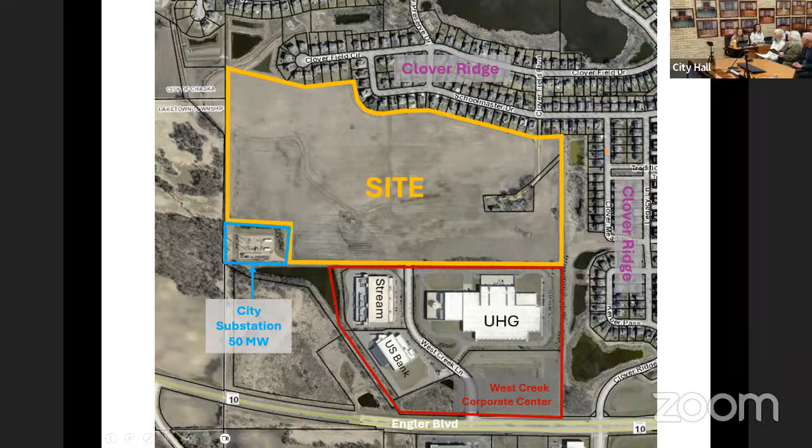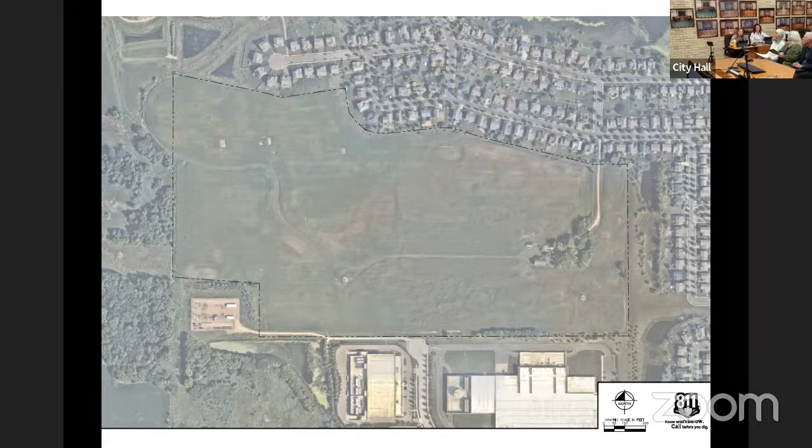There is a city-owned substation southwest of the property, and additional rural and rural residential areas to the west. Also off of West Creek Lane are 3 other data centers, so this would be the final site to complete out what is known as West Creek Corporate Center. Here's a more simplified aerial view of the property if we need to go back to it for any reason. But getting into the process side of things and where we're at.

As most of you are aware, but for those that are new to the city's process, it requires a 3-step process for a majority of our land use applications. We are in the second step of the 3-step process. The concept plan, which is the first step, was completed in 2022. So we are at the second step, which is the preliminary site and building plan and rezoning and more of that technical analysis.

So this is more of that detailed review and understanding of code and how the project complies. And then if things were to move forward this evening and with City Council, the third and final step would be final site and building plan approval.

So in terms of some previous approvals that have occurred on this site, it does date back to 2015 and 2017 when the first concept plan and preliminary plan came through for the site. This was for a different project than CloudHQ, which was for four data centers. At this time, in 2017, is when the rezoning occurred on the property to Planned Industrial District number 7. And at that time is when development standards were put in place that were relevant to the project proposed with the four data centers.

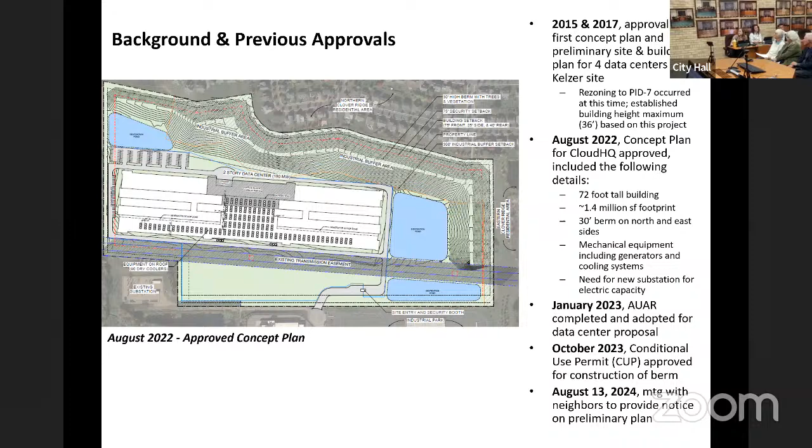In terms of existing conditions on this property, the property is currently zoned under PID 7, or what we know as Planned Industrial District number 7. It is a roughly 72-acre site composed of two different parcels. There's a smaller parcel that contains the homestead on the property, roughly 1.6 acres in size, and the larger parcel is a little over 70 acres in size and has been used as agricultural land.

The driveway to the homestead does come off of Schoolmaster Drive to the north here to access the property, and that comes through a city-owned outlot between the existing residences on Schoolmaster Drive. That driveway will be abandoned with this project.

There also exists a significant electric easement that runs east to west through the property, dashed out here in this exhibit, and we'll show other exhibits that clearly identify it as well. It's 125 feet wide, and it's meant to contain the overhead transmission lines that bifurcate the property as well as surrounding properties. There are two transmission towers that currently exist on the property, and that will remain with the course of the project.

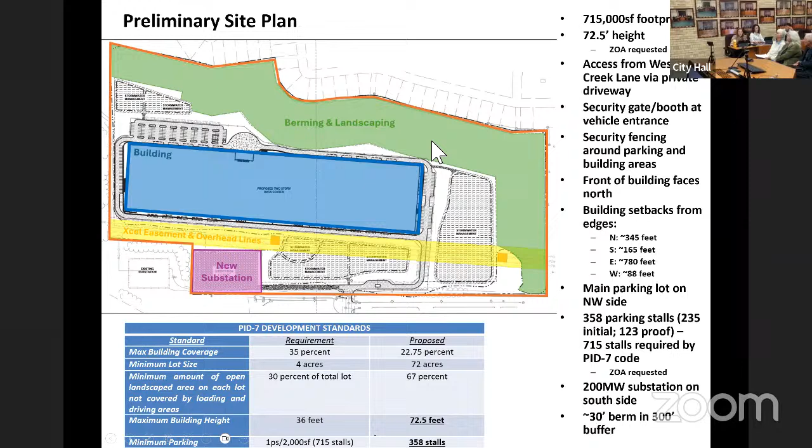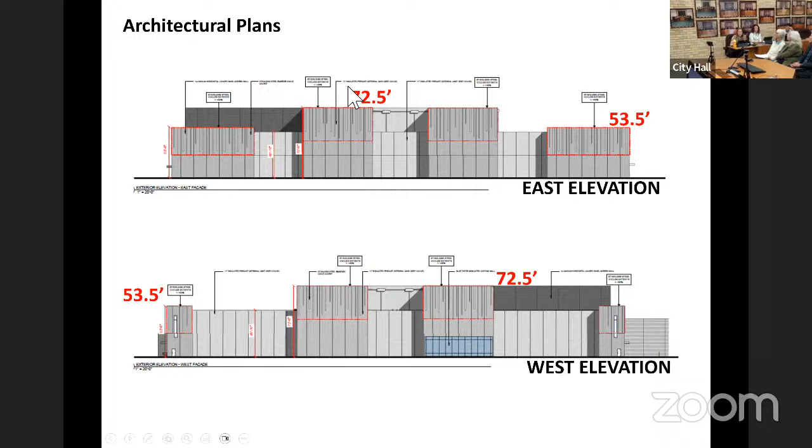Getting into the architectural details of the proposal, this slide shows the east and west elevations of the building, defining where that 72.5 feet part of the building really sits, which is at the top of the penthouse portion. The 2-story area goes up to 53.5 feet. So again, it ranges between 53.5 feet at its tallest building parapet to its tallest penthouse point at 72.5 feet.

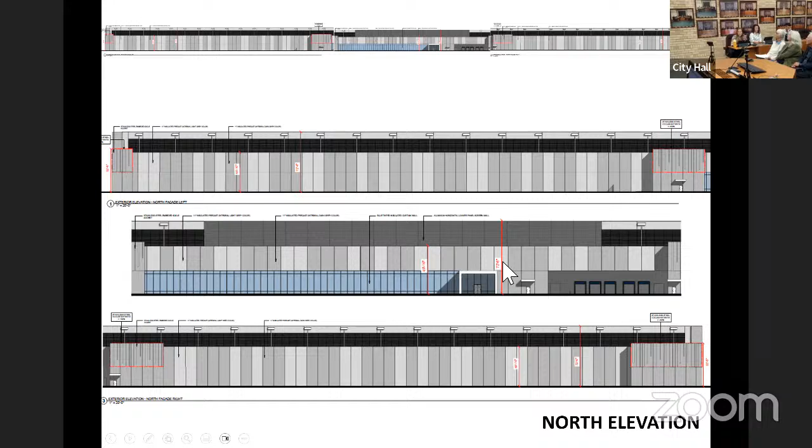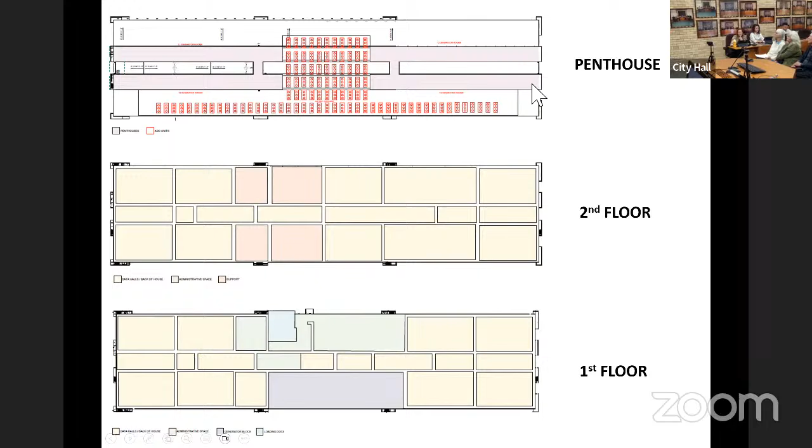The materials proposed on the building are a mix of different materials. They will be using mainly precast concrete panels in two different colors, a light and a dark gray, to help provide some interest between the panels. Some portions of the panels will integrate an aluminum embedded icicle accent into the concrete to provide another varying element. Glass and metal cladding will happen around the main visual areas on the north and west sides of the building.

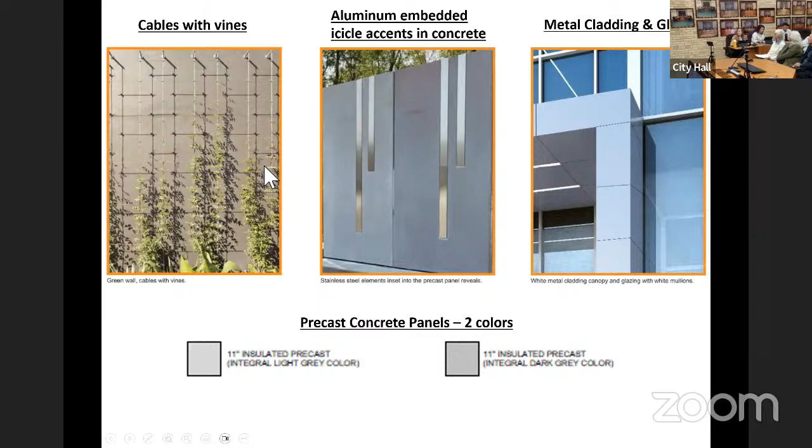In addition to the concrete and aluminum embedded accents, they will also be incorporating vine walls to the sides of the buildings using precast concrete to help provide a soft edge. You can see how that is being utilized in these renderings here. This is the west facade, probably the most visible from adjacent properties, and the north side with the glazing system on the front. You can also see the use of those icicle accents as well.

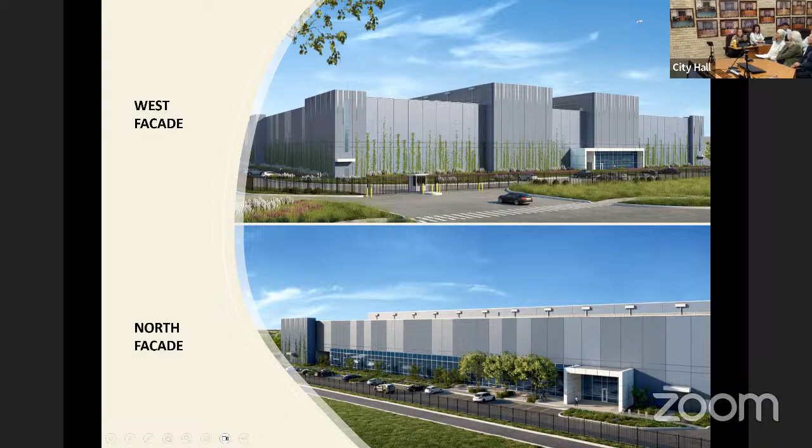Getting into the landscape plan, our landscape plan quantity requirement is based on the square footage of the building, in this case 1.4 million square feet. That entails, from a requirement perspective, placing over 1,500 overstory trees on site, 390 understory or ornamental trees, and over 2,300 shrubs.

The site is also providing a 30-foot berm along the north and east sides of the site, and they provided some cross sections as well as renderings to provide that visual detail from the adjacent sites.

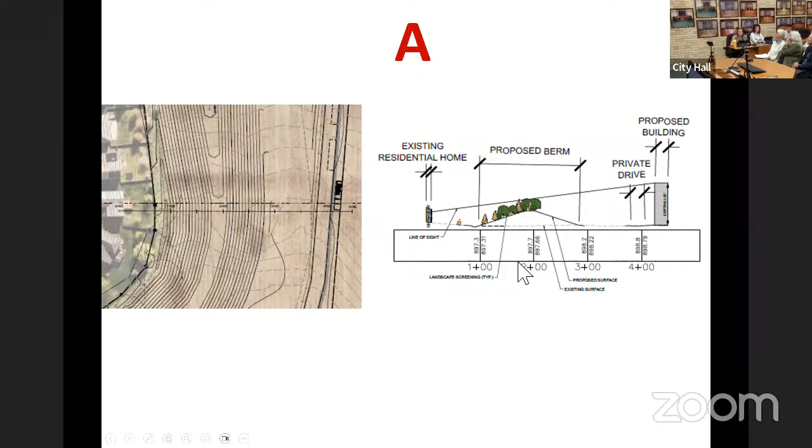The next cross section is on the east to west edge of the site, between the building and the properties on Clover Meadow Drive, to show that separation and visual being seen from the adjacent residential.

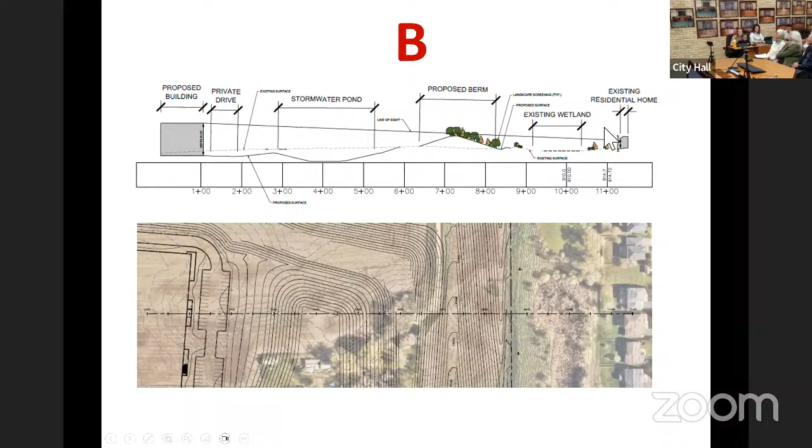The third cross section is shown on the southeast side of the site, between the building and the homes in that corner. This cross section was also included because this portion of the berm sits at roughly 20 feet tall versus 30 feet tall, due to the existence of the transmission line, so it does have to step down there to be within the parameters of that easement area.

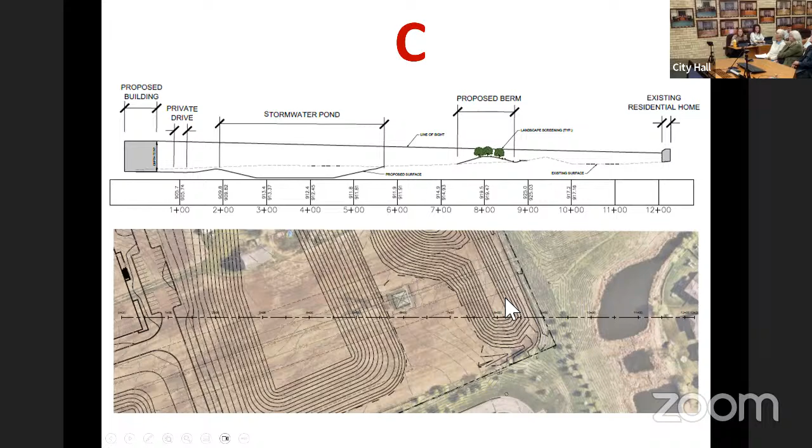The last one is the west edge, adjacent to open land on that side, followed by a couple renderings. These were included during the concept plan as well as into the preliminary, to provide visual detail as the plantings become more mature, and what's being seen from adjacent residences and what portions of the building can be seen from those backyards. It was noted that the planting plan in these renderings is probably half of what's shown on the landscape plan today, so the plantings here would almost double what you're seeing on these exhibits.

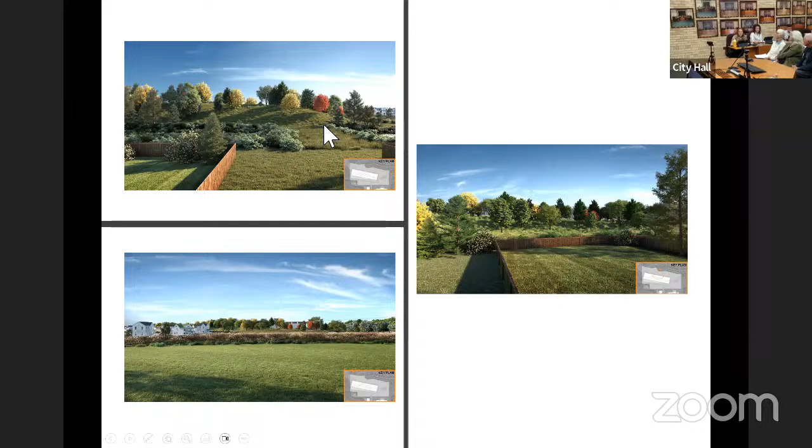Getting into the substation details, this is the portion that requires the conditional use permit. The proposed substation is a necessity for the data center to operate upon conception. It is a 200 megawatt substation that would help feed a portion of CloudHQ's electric need. The first phase would provide at least 50 megawatts to help accommodate the initial needs of CloudHQ's site. CloudHQ will eventually need up to 220 megawatts, gaining 170 megawatts from a different, more regional substation planned at a later date.

But at least for the initial start of their construction, they'll need 50 megawatts, which would come from this proposed substation on site. The additional 150 megawatts able to be serviced from this proposed substation would help service the needs of surrounding users.

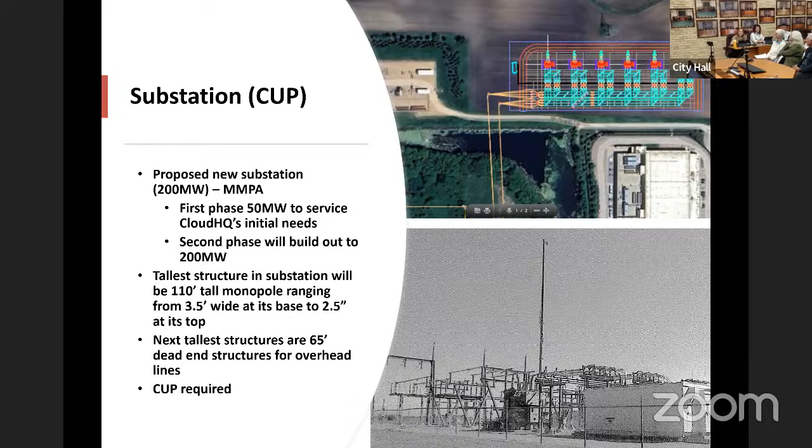Substations do require a conditional use permit with the city, so they are asking for that as part of their request. Essential services require a conditional use permit, which includes substations. There are 6 criteria denoted in our CUP portion of our code, which have all been responded to.

To summarize the proposal, the substation is a needed piece for the data center to be built on the onset, but it will also help supplement surrounding users in the area, both on the business side and on the residential side.

The positioning of the substation was intentional, placed next to the existing substation, which is the furthest spot away from nearby residential. It will also be mainly screened by the building itself that's proposed, which is 72.5 feet tall.

It would also be screened by the 30-foot tall berm on the east side. So the pieces within the substation would fall below what the building is proposed at in terms of height, except for the monopole structure that was mentioned.

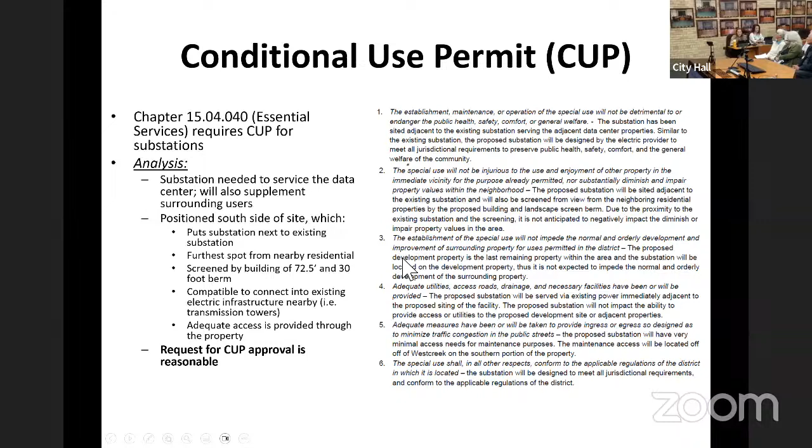The access to the substation can be accommodated through their site that they've shown on their site plan. So the criteria listed for a conditional use permit has shown to be met. Therefore, the request for the conditional use permit is reasonable.

Getting into the zoning ordinance amendments, these are 3 different amendment requests for the proposal. One is related to the parking provision, one is related to building height, and the last is related to the landscaping provision.

For the parking amendment, they are proposing to amend the language that calls out the parking regulation for data centers in the PID 7 district. The code currently states that 1 space is required for each 2,000 square feet of warehouse or data hall area. The proposal would amend that to 1 space for each 4,000 square feet of data hall area. It was anticipated during the concept plan approval that there would likely be parking changes as a result of this site plan, so this is not out of line with what has already been anticipated.

In terms of how we looked at this change, we based it on precedents out in the West Creek Corporate Center area that contains 3 data centers today. These data centers range in size from 52,000 square feet up to 250,000 square feet, and we looked at the parking provisions on site, which range from 30 stalls to 60 stalls for the larger building. When visiting the site and looking at aerial photography of these sites, since you can only get so far in,

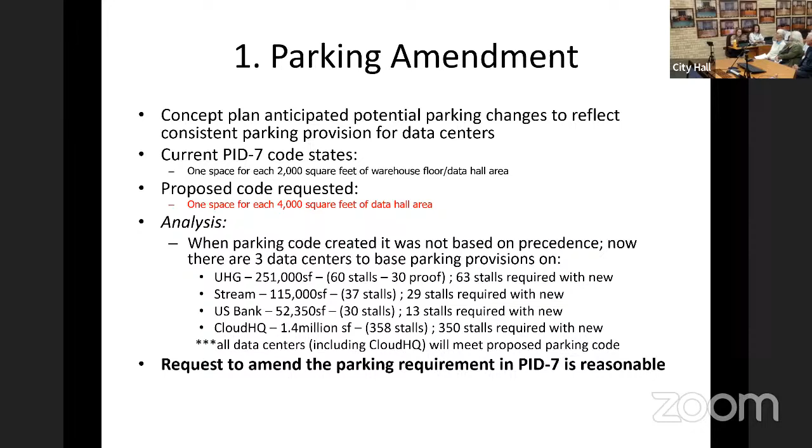In terms of the building height, going back to the concept plan approval for this project, it did indicate a height of 72 feet during that approval. So there was anticipation that PID 7 would have to be amended for the max building height. PID 7 currently lists the max building height as 36 feet, and this standard was put in place in 2017 when the site was rezoned as part of the 4 data center proposal.

So the height was consistent with the height that was shown on that data center use and project. Just want to note that that's pretty typical when we go through a rezoning process. When we do a plan district, we are curating the development standards based on the project before us. So that is why the 36 feet has been codified into the development standards.

It was based on a previous plan that showed a 36-foot high building. The proposed maximum height requested for an amendment is to keep the 36 feet requirement on the existing buildings within the West Creek Corporate Center. And then for this lot in particular, allowing the 72.5 feet requirement for max building height. That's based on the fact that the berm height differs on this site compared to the berm height on the southern data centers. So we are basing our analysis on the screening that is able to be achieved on the CloudHQ site.

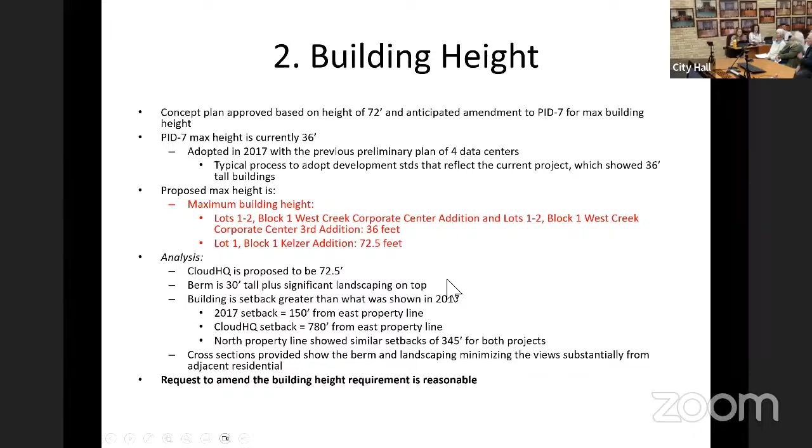And then lastly, the amendment to the PID 7 district for landscaping is based on a different look at how we are looking at this site. This property requires over 1,500 trees, over 300 understory trees, and a substantial amount of shrubs. So they are deficient in all three categories required for this size of building. They're deficient by 636 overstory trees, deficient by 67 understory trees, and 884 shrubs.

So they do have a portion of the backside of their berm that could accommodate additional plantings. It would basically mean what you see on the north side would be implemented on the backside here in terms of plantings.

However, it was considered whether or not there are better, more productive alternatives to placing those plantings in a more productive or public-benefiting space, and also provide a more sustainable outcome for those plantings.

So the few alternatives we've explored on the front end: one is to install trees on the city-owned area east of the site to help bolster the residential screen edge, which they have done by placing 23 trees in this area immediately adjacent to the property, which is currently pretty open, just tall prairie grass out there today. That was one alternative. The second alternative would be to create a tree bank or collect a tree fund to capture the deficient landscape quantities and use it in public-benefiting spaces like public parks.

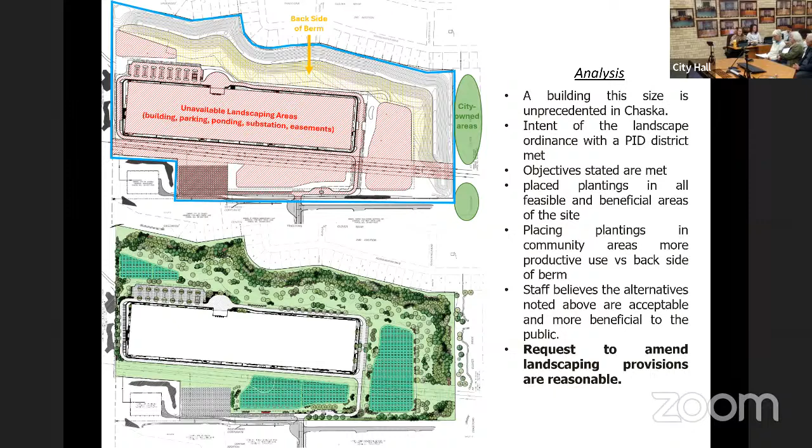So that concludes the proposal. There are a couple motions you would be making this evening. One would be to make a motion to recommend approval of the preliminary site and building plan, the preliminary plat, and the conditional use permit for CloudHQ, based on the conditions listed in the staff report. And then a motion to recommend approval of the zoning ordinance amendments to PID 7, based on the draft ordinance. If this were to move forward this evening, the city council date it would go to would be Monday, October 21st.

Happy to answer any questions. We do have the applicants in the audience, and this will also require a public hearing. Thank you, Liz — a couple of quick questions.

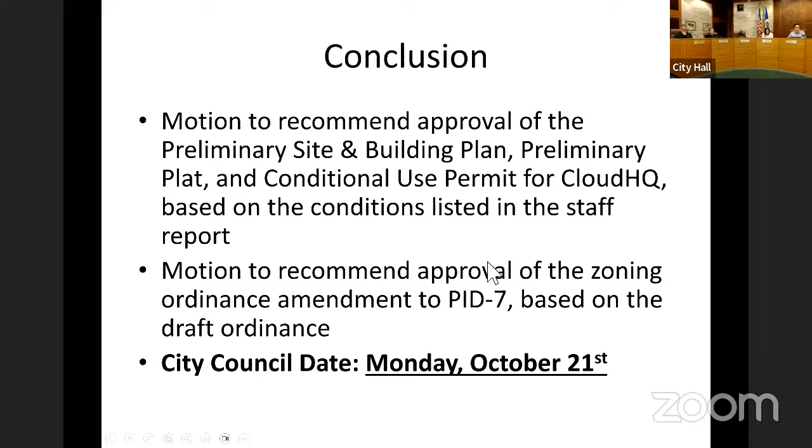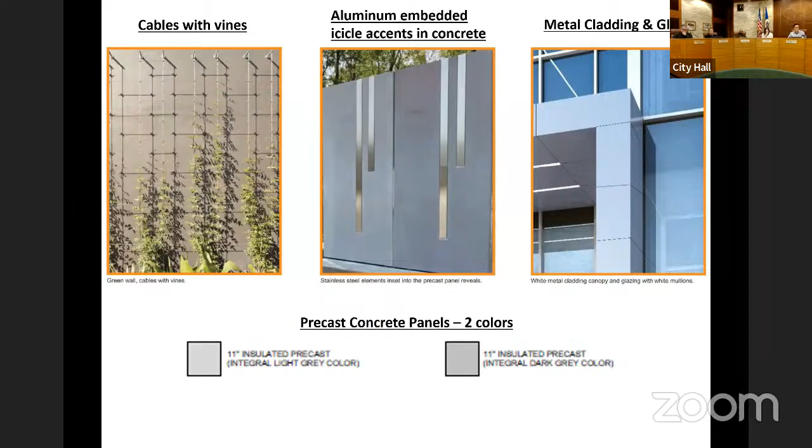And it's kind of some minor things, I'm sure it's considered, but the homestead driveway. It's technically not on the site, but it's like an easement between houses. Is that going to be something the applicant fills back in for the neighbors between their yards, or is the city going to do that? How do we make sure that gets taken care of?

Yeah, it is within a city-owned outlot today. However, I think that's a detail we don't have specifics on quite yet in terms of how it'd be finished out, but maybe the applicant knows where they're at with that, because obviously it's going to be taken out as a part of the project. So how would they finish it off?

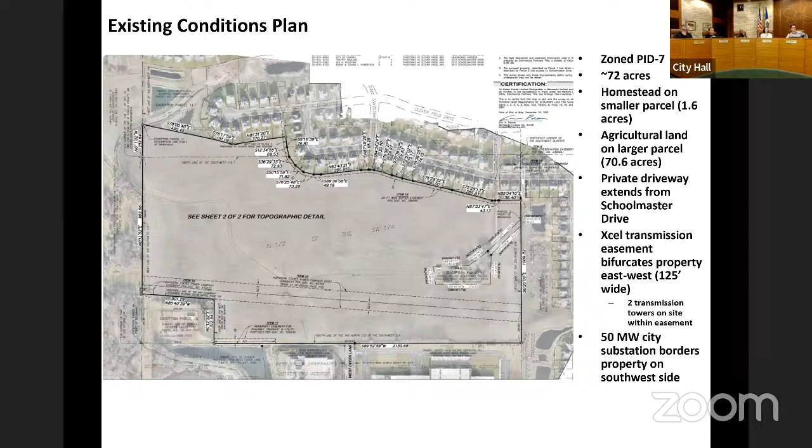Okay, the tree plan, the 20-year plan for landscaping. Are they going to draft up some sort of documents for enforcement of that? Is that for if trees die, they're going to replace them, or is there any documentation on that, or anything been discussed in this 20-year plan?

And maybe I need to clarify that a little bit. The point of the 20-year plan, which is shown on this exhibit here, in terms of the scale of the canopy that the trees would get to at around that time, approaching near mature scale, we wanted to understand what that overlap may or may not look like to see if it looks like a sustainable plan. We've also been in communication with the landscape architects to understand what a feasible plan looks like from their experience, and this is that plan.

So in terms of replacements, that would come at kind of the same warranties that any other landscape plan would have. I just think it'd be important — obviously there's going to be a lot of trees — how are we going to make it so there's something in the final development agreement that they have to replace trees, or something of that nature?

Sure. Then the tree fund, let's say they go the tree fund way, or the tree bank if you will — I heard you mention you could use it in other spaces in the city, public places. I thought, do they have to be public places? What if the immediate adjoining neighborhoods, their direct parks, have dead trees, or even if the neighbors themselves have trees that aren't making it in their front boulevard — can this tree fund be used to help out adjacent neighbors that are right there as well, if they happen to have a dead tree or something like that? So they get something in return with these excess trees, since they're the ones potentially affected. Does that work if you cross over privately like that?

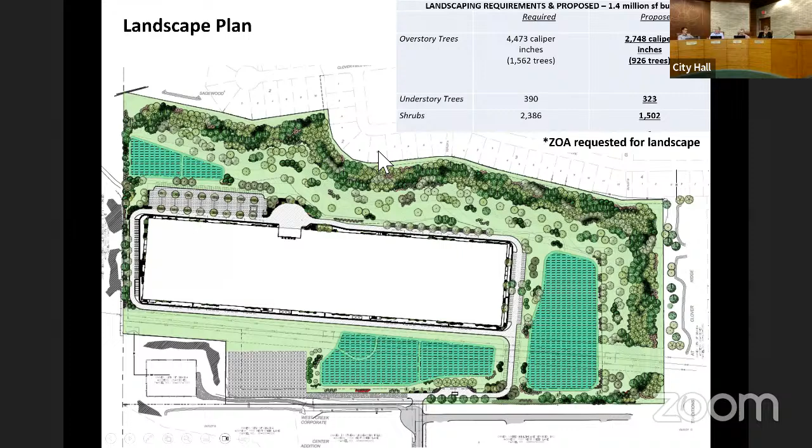Commissioner Olson, I feel you're giving staff a lot of credit for that, but this was discussed at concept as a side note with very little discussion. It was brought up as one line saying they're going to come through at preliminary needing an amendment, and that was all that was discussed. I think we even had renderings and berms at concept, there was talk of it, but there was one statement saying they'll need an amendment. So the 72, we were aware of it, the berms and renderings too, but ultimately the question is, going back to the beginning, how did it get from 72 feet versus knowing it was planned for 36?

Sure, I think I understand the question, so I'll try to answer. At concept, CloudHQ was very open with their intention from the start that they would propose a 72-foot building. Staff informed them of the conditions in the current zoning. That was discussed at concept, presented to Planning Commission and City Council. There were renderings provided, and the renderings Liz showed today of the berm with landscaping were also available in the concept packet, so that was shown then as well. Staff was pretty upfront from the onset with CloudHQ that if they wanted to pursue that height of building, the sight lines would need to be a priority.

And so the berming and the landscaping, and being sensitive to what the outcome for the neighboring, existing neighborhood would be in terms of sightlines they'd experience, would be key in analyzing whether that could make sense or not. CloudHQ has come forward with the same footprint and the same height, the same berm, with more landscaping on it than was presented in concept. So at concept, what staff heard from Planning Commission was a recommendation to council for approval of that, knowing what the building was, knowing there would be a need for an amendment to the zoning. Council had that same discussion and approved that concept plan. So I think that's what led CloudHQ to feel comfortable coming forward at preliminary with what was approved in concept, and that's why we're making this recommendation tonight based on the direction provided by city council in their concept approval.

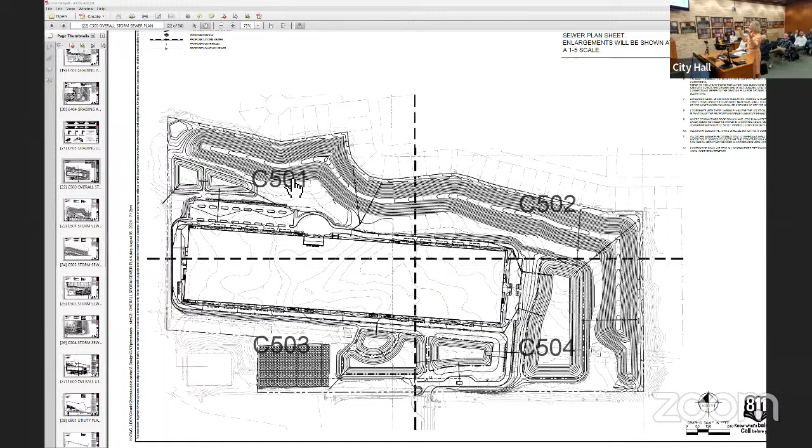To answer your question, yes, on the backside of the berm there's going to be a pretty significant swale. From the properties, the houses, I know a lot of them go back towards the CloudHQ property, so there'll be a swale that will collect not only the runoff that goes off of the residential properties, but also comes off of the berm. That swale, either on the ends, will come around to the stormwater treatment ponds, or in the middle of the berm on the north side there's dual culverts, one for redundancy, that will bring the stormwater through. So it has been very thoroughly engineered, and on some of the plans in the packet there's a lot of contours with a 30-foot berm, but if you look closely at the contours on the north side, you'll see swales that will carry that water either around or through.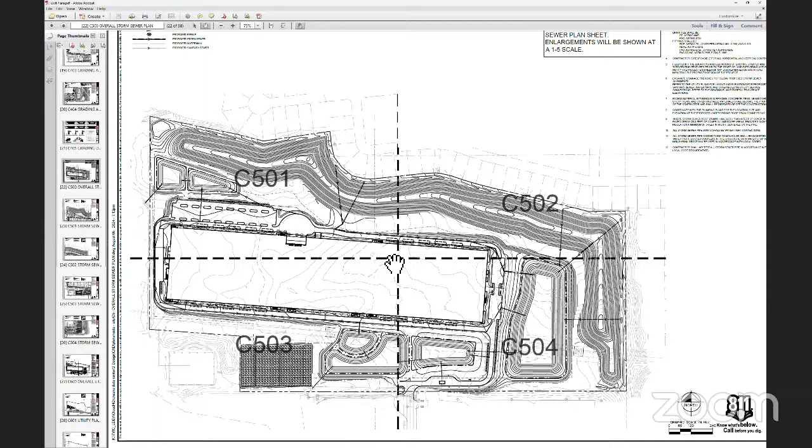I still think a 30-foot berm, I'm not sure exactly where it was surveyed from. Probably from the front porch, but if you were surveying from my street level, for example, if you walked out into the front of my house, 1987 Schoolmaster Drive, and pointed the laser back, you would get a number. By the time you get from my front to the back of my house, I'm already 25 feet above the ground. So once you get into my second story, I'm not sure if you're expecting that to cover, or if the point is that you should be hiding CloudHQ on the backside, 30 feet is not going to cover it on Schoolmaster.

All right, what was your name again? David LePage. David, so are we switching questions now to visibility? I'm just making a point, that's all. I'm just trying to understand for the commission, because you were talking about the water.

I think she answered your question. No, yeah, absolutely, thank you for the water question. Yes, I did switch questions. I just want to close the loop on what your question was and whether it was answered. Yeah, no, it was answered. Thank you. Okay, fantastic.

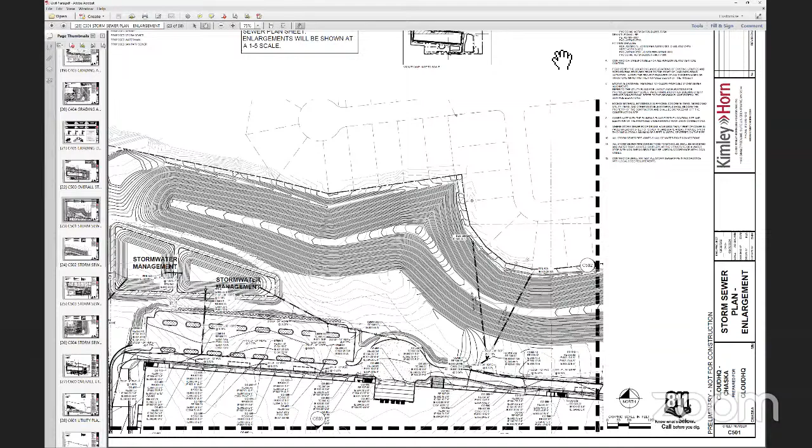But I definitely will probably sell my house in a very short period of time, just because I'm not really super fond of plans. I work in software, I have a lot of different things going on, but it's kind of encroaching on my property. So I think your plans sound good, but I personally have concerns, just a couple. Okay, thank you.

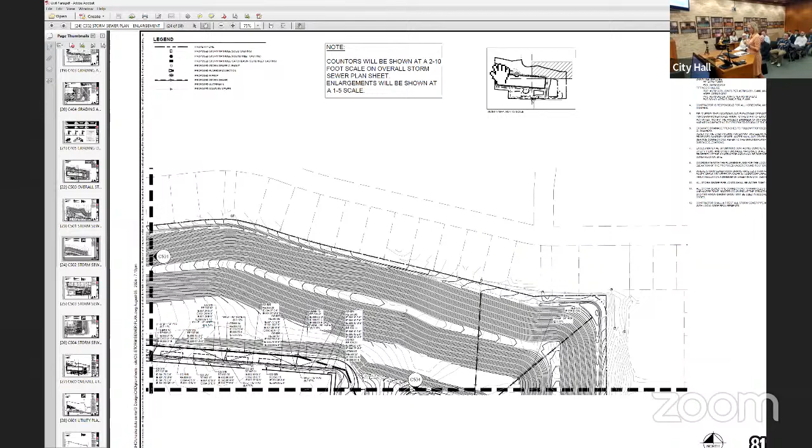Chair, would you like me to try to respond to the elevation question? If you can. So the berm, I wanted to speak anyway to answer your earlier question about the height of the berm and if it's consistent, I think they tie in together. Everything, the berm height, where we say it's like 30 feet plus or minus 1 foot, so it was very consistently 30 feet. Where you'll see it, if you're looking at it in the horizon, it'll look like it's going like this, because that's how the existing grade goes. And we're measuring it from the property line, that northern property line, so from that property line it's going to be 30 feet.

And then some of the renderings, if you look closely at what we did with the cross sections, they show that line of sight from midway up what would be the house. We have the contours for where some representative lots go up, and we show that line from what would be approximately the main floor, not the basement, but the main floor.

So we tried to be really considerate, knowing a lot of these are walkouts, so we looked at the line of sight from what would be your kitchen window. The 30 feet will actually follow the natural grade, so it'll look nice instead of looking straight across. There'll be some natural variation, trees at different heights. Thank you. Thank you as well.

You see the screen in front of you? Yes, we can see it. Okay wonderful, just can't see color. No color? No, TV's like dying. Oh really, it's lost its color wheel.

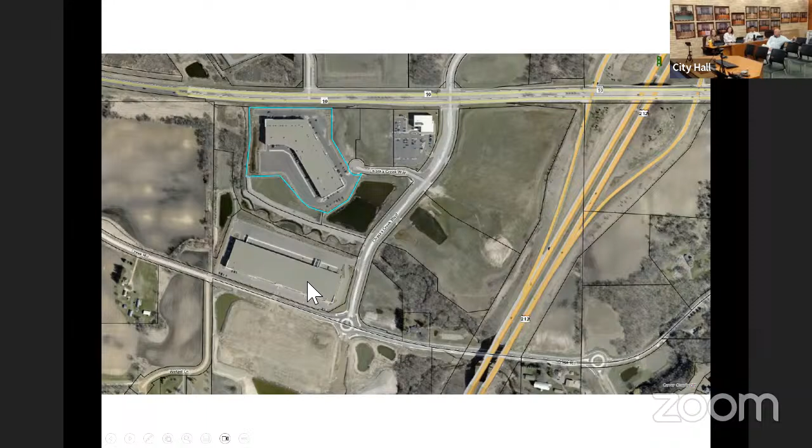We have a zoning ordinance amendment in front of us for the entity known as DBAT, wishing to locate at the address known as 1230 Chaska Creek Way. This is being proposed by Chaska Industrial Owner 1 LLC. The site in question is highlighted in blue on this aerial exhibit, an existing industrial building located just south of Engler Boulevard and west of Chaska Creek Boulevard, in the area previously planned for a Hy-Vee on the corner site. There's an existing medical office building on the corner of Engler and Chaska Creek Boulevard, and an additional industrial building built with the North Industrial Building in question tonight, existing out there.

The building in front of us, which the zoning ordinance amendment highlights, is 1230 Chaska Creek Way, also known as Lot 1, Block 1, Chaska Creek Center, 3rd Addition. This property is zoned PMD 20, Planned Multi-Use District. In January 2021, the preliminary plan and rezoning were completed for this building and the south building to be rezoned to PMD 20. In March 2021, their final plan was approved, and both buildings have been constructed since.

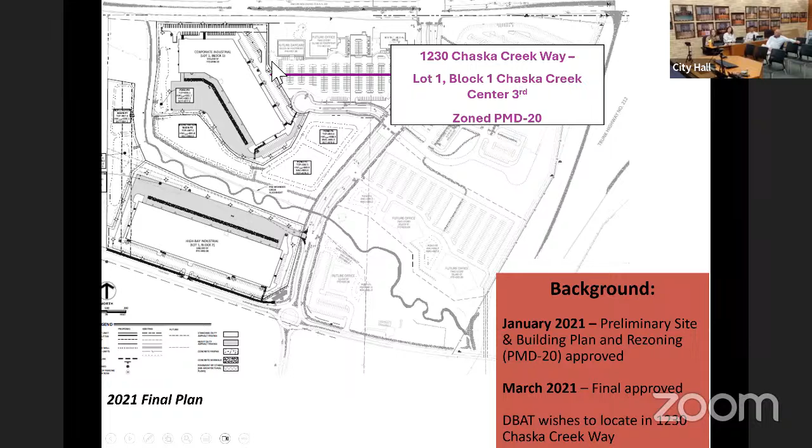DBAT is a baseball and softball training facility. They wish to locate in this north building, 1230 Chaska Creek Way. So the request this evening is specifically a zoning ordinance amendment to PMD 20 to include baseball and softball training facility use within that zoning district.

The comprehensive plan guides this overall site for business park. As part of the definition of business park in our comp plan, it allows for supporting retail and services within the business park district, specifically calling out healthcare and fitness as supporting services. The current zoning district permits office and manufacturing, warehousing facilities, not including distribution centers. A training facility or recreational use is not specifically called out in this zoning district, hence why they are requesting an amendment.

To get into what the entity really entails and the building they're locating in: DBAT is a national company specializing in baseball and softball training facilities. They have locations in over 150 places across the country. They specialize in first-class training facilities, providing instructors, camps, and clinics. It's open to the public, not specific to a group or team, so people are able to use the facilities as they're built.

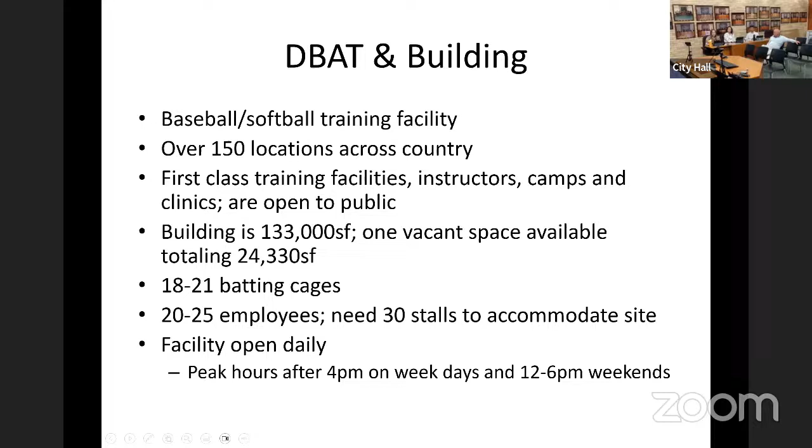It would employ 20 to 25 people, requiring roughly 30 stalls to accommodate employees and visitors. Opening hours would be daily, from 10 a.m. to later hours on weekdays and Saturdays, and Sundays 12 p.m. to 6 p.m. Their peak times are mainly after 4 p.m. on weekdays and between 12 and 6 on weekends, so something a little more offset from your typical office or industrial user.

We had them evaluate the parking at this location to understand if the requirement for this type of use could be accommodated. Based on existing users and the proposed recreation use, it would require 302 parking stalls, 225 of which are already constructed, and 77 shown as proof parking. So the site can accommodate the parking need. I also want to note that when they were approved for their final plan in 2021, this specific building and site was able to accommodate 410 stalls if needed.

Just to clarify, are they going to build more stalls or is it already there? No, they can already accommodate this based on the parking out there today. The 302 is based on our parking code requirement, and they've evaluated that there's more than enough to accommodate existing and proposed uses.

The buildings are in a TIF district, tax increment finance district. There are certain limitations on how much use outside of manufacturing, warehousing, and research and development is allowed within a TIF district, because its purpose is to create large manufacturing-type users that bring in a bigger portion of jobs for the city. That's why there's a statutory requirement limiting outside uses to 15% of a TIF district, and this use would be an unqualified use counting toward that threshold. Based on the size proposed and what exists today, they're at 8%, so they are within the threshold and it doesn't pose a concern with the layout of the district today.

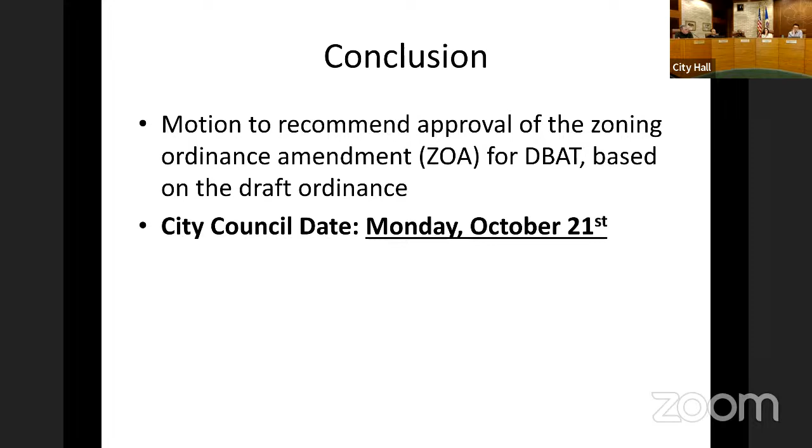Thank you, Liz. I'll make a couple of quick comments. I'm very familiar with these types of uses, they're all across the Twin Cities. These are the buildings they go into, whether it's climbing walls, batting cages, gymnastics, tumbling, for just all various types of fitness type uses. They go into these warehouse buildings. I think it's very appropriate.

Matter of fact, going forward, maybe the city can think about when we open up districts like this, rather than going through the process of a zoning amendment, it could be a conditional use. When we do some sort of industrial use going forward, this is such a common thing, you see it all across the Twin Cities, that a conditional use permit is typically what you have to get through the city. On this, I know this was approved specifically with this district, and we kind of had this a lot, right? For each development, it's approved for a specific use for whatever's going in there, and we kind of control it.

So, in all actuality, I'd almost rather see it expanded to say recreational sports rather than just baseball, softball. Again, we're pigeonholing just this use for this. Let's say they happen to have a gymnastics facility on the next building. Next year we're doing this again, where they could have just had, maybe, a conditional use permit. So that's just my thought out loud there for the city.

Yeah, I think it's kind of the same thing. That particular location's been empty for quite a while though, part of it, right? Well, the building is full— has it been there 2 years? Probably-ish, yeah, probably. They're down to this one vacancy, it looks like.

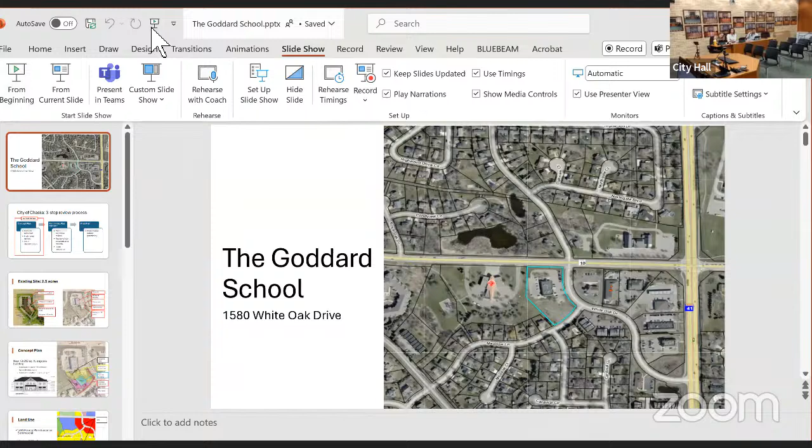Liz, can you jump right into 7C, please? Ashley's gonna take over—Ashley, third and final. Ashley? Yes, it'll be me. Just need one second here, and I will make my presentation brief for you this evening. How about that? The remaining applicant, appreciate your patience. Thank you for sticking it out.

Okay, before you this evening is a concept plan by the Goddard School for a licensed daycare facility. There we go, that's better. And I've never been told that I talk quiet in my life, so it's always such a pleasure when I speak into this microphone and get told that.

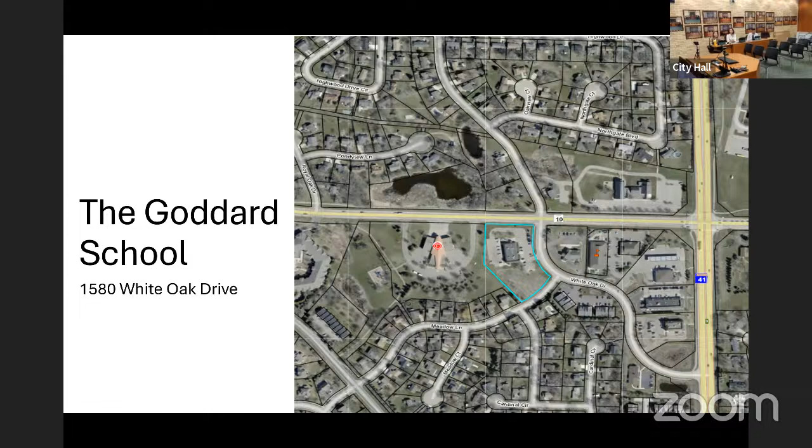At 1580 White Oak Drive, the site is generally located in the southwestern corner of White Oak Drive's intersection with Engler Boulevard, so west of Highway 41 and also east of the city's fire station property. As you know, Chaska has a 3-step review process. Tonight we are in the concept plan review, so that first phase. So our plans are generally high level, which also means that our review is equally high level. So we're here this evening generally presenting some of the issues that were identified as part of this process that will be addressed in those later steps within the process.

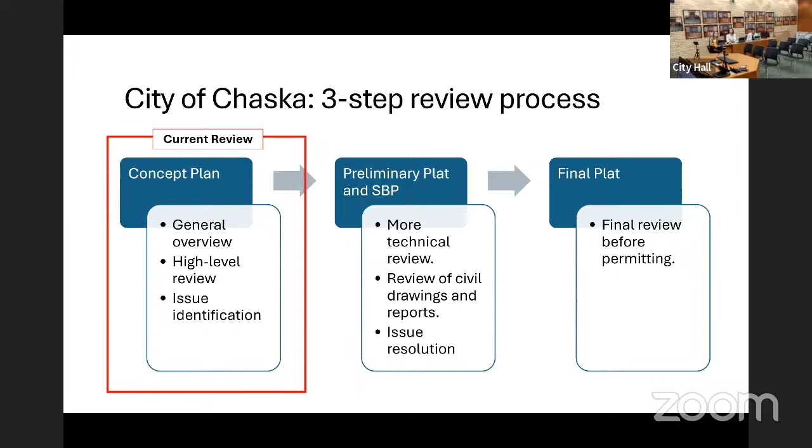The 2.5 acre site was part of the North Meadows 8th addition plat, originally approved in the early 90s. Shortly after that, the site and building plans were approved for a new medical office building. It was anticipated at that time that it would occur in 2 phases. That first phase, the northern section, was built shortly after approval of that plat. It included 70 parking stalls in a configuration that wrapped around 3 sides of that 12,000 square foot building. Currently, there are 4 tenants within that building—3 of which are generally medical office type uses, and the fourth is a fast casual restaurant use. There's also an existing sidewalk that runs along the east side of that existing building, on the west side of White Oak Drive, and it terminates just north of the site access.

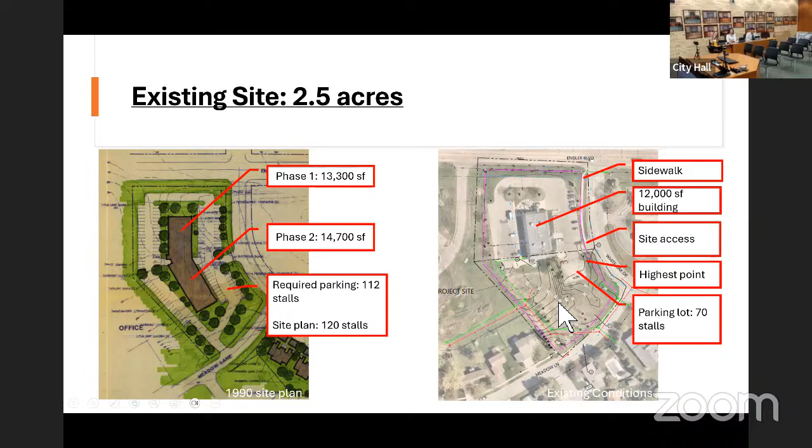Phase 2, as you can see from the existing conditions, was never constructed, so that portion of the site is currently vacant. This evening, the concept plan contemplates construction of a new daycare building on that southern section. The daycare would be licensed for up to 159 children, anticipated to have about 35 staff at full capacity, and operate Monday through Friday from 7 a.m. to 6 p.m. Access to that site would be shared via the existing site access as currently proposed. The site would be regraded for the new building, with 2 play areas shown here in pink, and new parking areas shown in yellow on the screen before you.

In addition to those site gradings, there are 2 retaining walls proposed to tie into the surrounding grades, essentially to create flattened areas for the parking and play areas. That northern wall would be roughly 5 to 7 feet at its tallest point, and that western wall roughly 4 to 5 feet tall at its highest point.

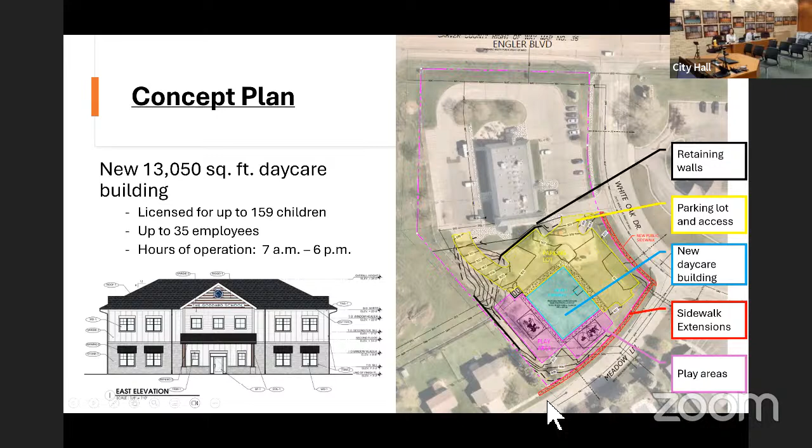The concept plan related to the site also includes a sidewalk to close the pedestrian gap from where it terminates along White Oak Drive, as well as on Meadow Lane where it terminates west of the property.

Now I'm going to walk us through the details of the concept plan and staff's analysis as it relates to that, and I'll try to do it as briefly as possible.

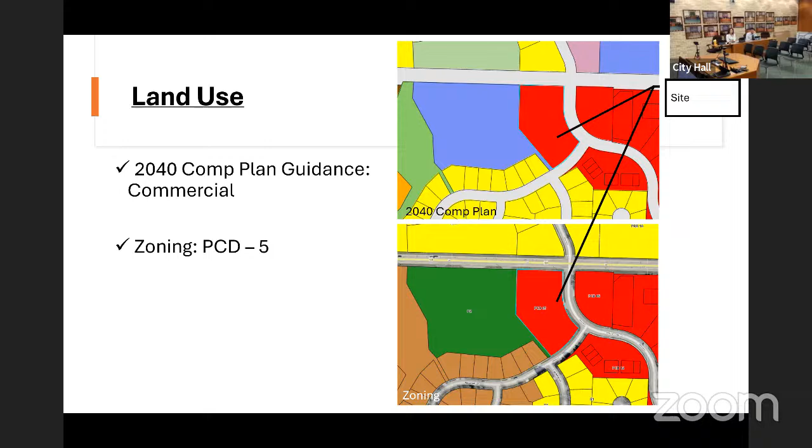First, looking at the daycare use itself, the comp plan guides the property for commercial. The property is zoned PCD 5, planned commercial district. Daycare uses are generally consistent with that guidance and zoning.

The new building would be just over 2 stories in height, roughly 13,000 square feet in total size with a footprint of half of that, so 6,500 square feet, and a code-defined building height of 31 feet.

The first floor generally contains the lobby, staff offices, as well as some of those younger rooms for infants and toddlers. The second story is more of the preschool age classrooms, as well as a multi-purpose room. Access to that second story is via stairwells that flank the outsides of the building and a centrally located elevator.

The 2-story building's facade would be comprised of high-quality materials consistent with what our code would require, so Hardie board, stone, and glass, with metal used as accents on that entrance awning.

That building height of 31 feet is generally consistent with what was shown in 1990 for building heights, because the second phase was anticipated to be the taller of those 2 phases.

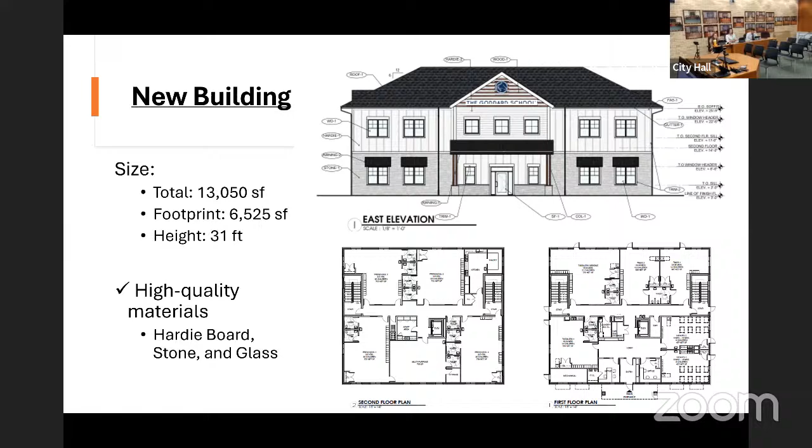The applicant has indicated that they intend to subdivide the property to put that new daycare onto a newly created lot. As currently shown, there would be the need for either a zoning amendment or a variance for that existing building to the interior lot line. Staff has identified that there is an opportunity to eliminate that by adjusting the lot line, so we do plan to continue to work with the applicant to resolve that issue ahead of the next phase.

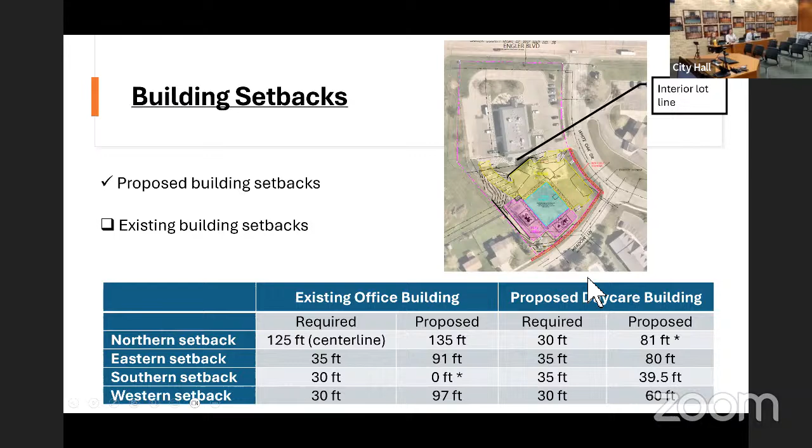Walking through site plan details: city utilities are readily available for connection. There are existing storm utilities as well as sanitary sewer utilities that do encumber the southwest corner of the site.

Staff will continue to work with the applicant as we move into the next phase to ensure that we've secured the proper easements for that public infrastructure, as well as that the private improvements would not impede, prohibit, or prevent future maintenance and replacement opportunities for the city.

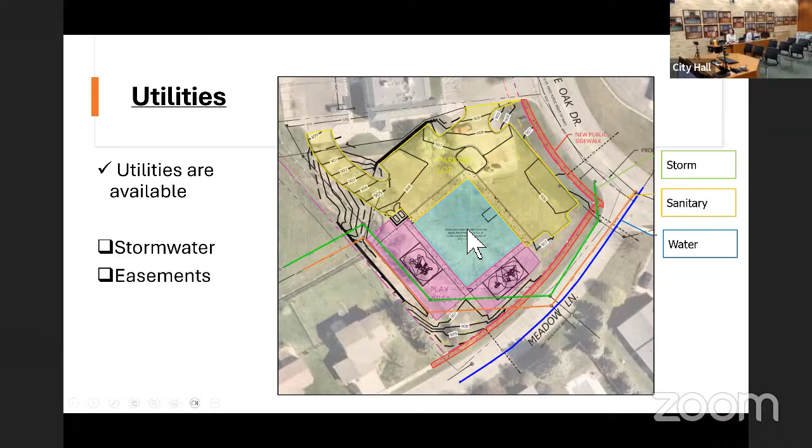The plan also indicates that the intent is to use underground facilities to treat for stormwater. The next phase would include the details of that plan, so you'll see that should the project move forward.

The plan does trigger the city's landscaping ordinance. Preliminary review of the plan indicates that there's an adequate mix of trees, shrubs, and perennials to screen the new site improvements, and this is included in your staff report for this evening. More detailed and thorough review would occur ahead of the next phase.

As I previously mentioned and is noted in your report, this sidewalk connection would close that pedestrian gap that exists here at this intersection. As staff has reviewed the plan, we've identified 2 potential additional opportunities to improve site circulation as it relates to pedestrians through the site.

The first would be looking for alternatives to improve pedestrian comfort on the front of the building by providing some sort of separation. Currently there's a 7 to 8 foot sidewalk, and then the parking area that's just separated by a row of bollards, so perhaps there's an alternative there to create some pedestrian relief coming in and out of that building.

The second, probably the more important of the two, would be to provide a sidewalk connection heading south to allow direct access from that external pedestrian network into the site. Again, staff will continue to work with the applicant on those issues ahead of the next phase.

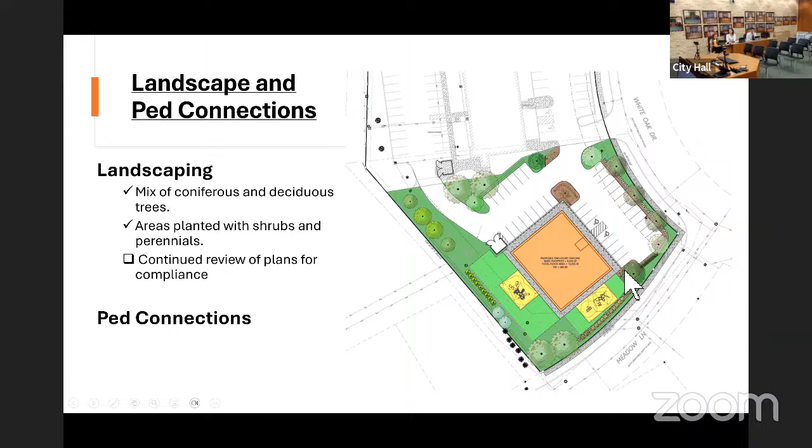As it relates to parking, parking lot setbacks as shown are appropriate, and the number of stalls exceeds what would be required by code. Those parking calculations and graphs are included in your report for this evening.

Acknowledging that the trip generation for daycares is much different than the original anticipated use for this site, staff reviewed ITE trip generation data. That calculation is included in the table for your report this evening. To summarize, the site would generate roughly 100 more average daily trips throughout the day than what was originally anticipated in the 90s.

The county has advised that after reviewing the plans and that ITE trip data, the upcoming roundabout project north of here, at White Oak and Engler, would adequately accommodate that increased trip generation, so they don't have any additional concerns and would not need to do any additional intersection analysis. Staff generally agrees with that.

However, just given the trip generation, as noted in your report this evening, staff is asking the applicant to explore an opportunity to provide a secondary southern access onto Meadow Lane, like was originally anticipated in the 90s. You'll see that analysis and review in the next phase.

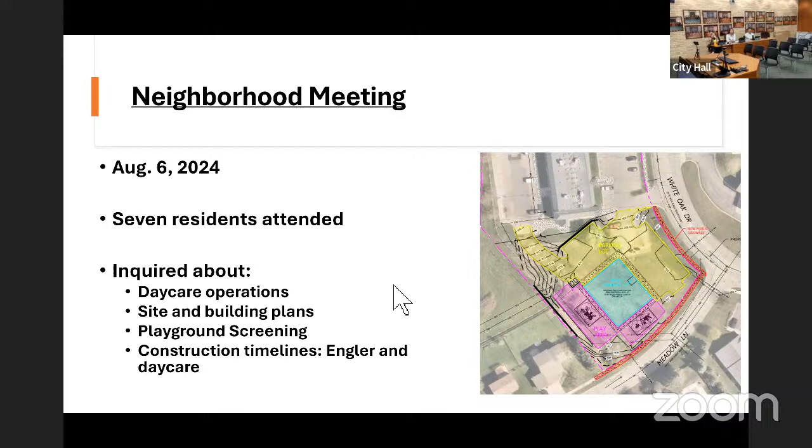Briefly wrapping up, the applicant did hold a neighborhood meeting at the beginning of August. There were 7 residents that attended. They generally asked questions about the daycare's operation, the plans, specific questions about playground screening, and general questions about construction timeline, both on the county's project and the daycare construction project. With that, I'll conclude this evening and look for a motion, but I'll answer any questions first.

Commission questions for city staff: I like the idea of putting sidewalks on both White Oak and Meadow, because there currently aren't sidewalks right there and people are walking out on the road going to Holiday. The sidewalk just stops. And if they put the roundabout there at Engler and White Oak, it'll help, though it could create a backlog of traffic. So I think having 2 entrance ways into that property is a really good idea.

My fear is people going through the neighborhood to get there, you don't want that. That's the hard part too. Good thing it's not that far that they'd be traveling if they're coming off Victoria. There was a conversation here too of the same concerns, that if you put it there you're going to have traffic.

The only benefit I could see is if someone's coming into the site, say it's a daycare, dropping off children and there's a bunch of people coming in, then instead of coming back out the same way someone's coming in, they could potentially loop out, correct? Kind of like the schools do, so it forces you to loop out and alleviate congestion. That's the only thing in my mind in favor of the second access. Otherwise I do think it could cause a little weird congestion, like it's one too many, but at the same time, in the morning and peak times when you're dropping off and picking up children, you could come out that way, and then back at that potential snake point where you're sharing with the next building.

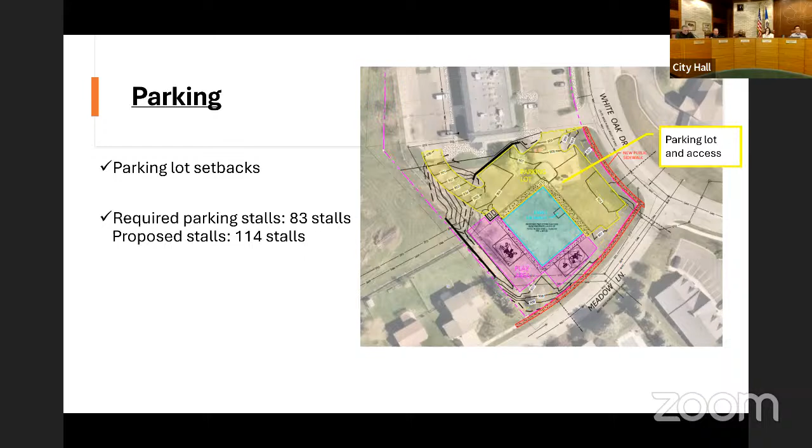Is there a rendering of this potential southern access yet, at the concept level? I think they asked them to do it, but not yet.

The concept from 1990 showed that secondary access along the southern property line. Was that drawn by hand back then too? That's back when they wrote letters with pens on paper.

I'm curious to see what the surrounding neighbors think. It's not a public hearing, but people can come up and talk certainly, there's a few people out here.

Before we roundtable this, I do have a concern about traffic congestion right there. I took my kids to Step by Step, so I know that area very well, and I could only imagine now you've got people diverting right there, slowing down, while others continue on into the area.

That's not a big concern, but I'm wondering what kind of issues may happen there, because I don't know there's enough width. Is there something the city can do to make sure there's adequate space for people to get in and out off of White Oak, since there's a lot of different entrances there next to the roundabout? It can get very tight.

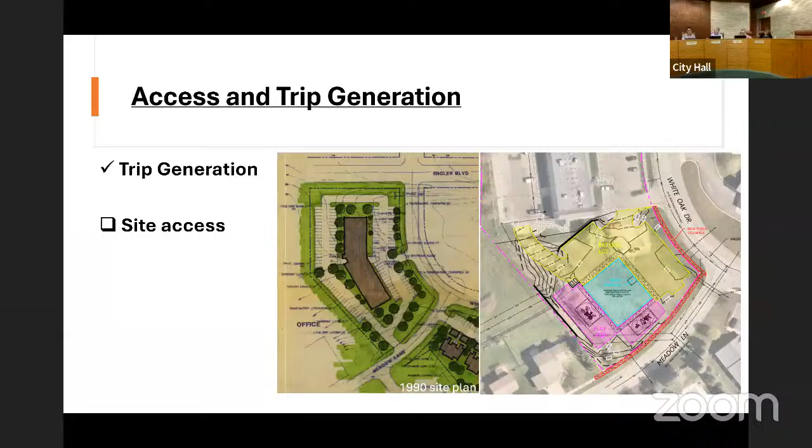Most people are coming from the right in, and that's the only good thing. I think with that extra access point, if they could egress out on Meadow, it would help a lot. That's where I do see where the city's coming from.

A quick right in is easy for cars to make and get into the lot, but coming back out and having to take a left across traffic is too much. That's where the extra egress could help. I'd agree with that - then they could come out at the main intersection and wait.

Is there anything else? Any questions for staff before I let people come up? If anybody wants to come up, I'll see some people here. Going once - the applicant is here.

Anthony and Laura Miller, 5026 Boulder Lane in Chaska. We are Chaska residents, love the community, I've lived here since 2020, and we would love to bring a premier daycare facility to the area.